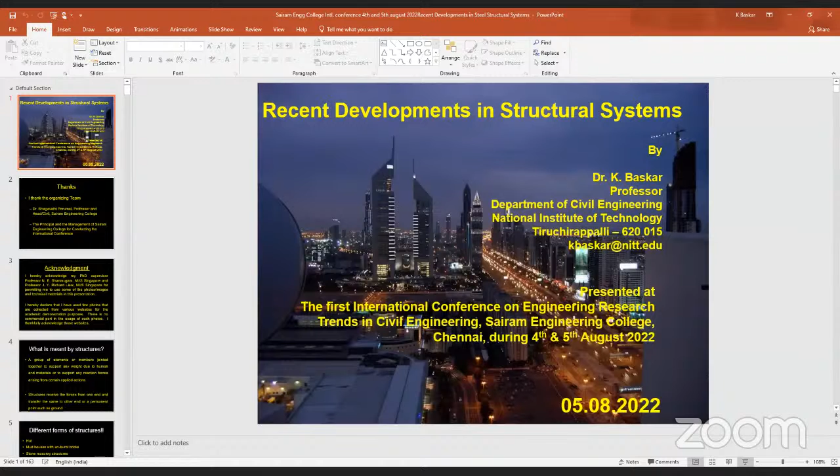Very good morning to all of you. I am Baskar, professor in the Department of Civil Engineering, National Institute of Technology, Tiruchirappalli.

First of all, I wish to place my sincere thanks to Dr. Bhagavati Perumal, who is known to me for more than 20 years, a good friend of mine, very sincere, hard worker, highly ethical and professional teaching faculty. He is a very genuine person, and I'm very happy to share some of my information in this conference organized by Dr. Bhagavati Perumal. When he approached me regarding a lecture on this conference, I immediately accepted for two reasons - one is to honor my friendship, the other is to share the experiences. Those are the two options.

It is disseminating knowledge from one end to the other end. What is the purpose of conferences? It is disseminating the knowledge from one end to the other end.

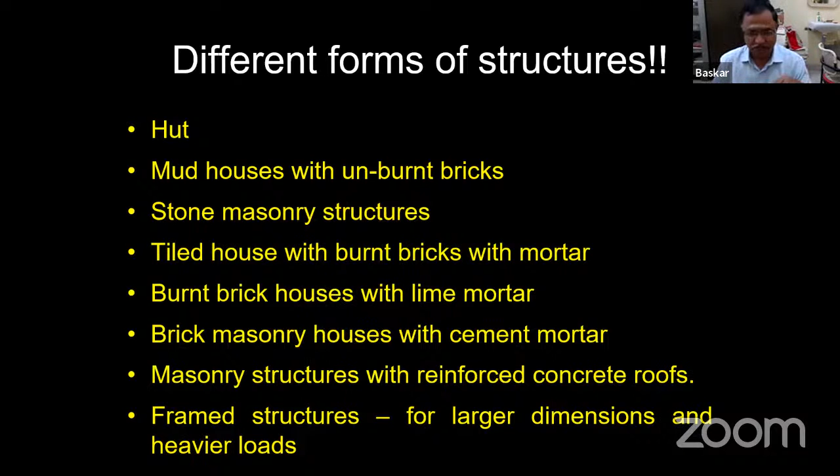Finally, now we are working on framed structures. Framed structure means it can go for larger dimensions and for heavier loads. Now our focus is more on framed structures.

In rural side, even for small buildings, people are still going for load bearing structures. This is very important because if you see the Indian scenario, almost 80% of the people are staying in villages, and not all are affordable for framed concrete structures. Still, in any part of India, load-bearing structures are very popular, and therefore they are also subjected to a lot of research.

Masonry walls are subjected to in-plane loading and out-of-plane loading. When we talk about masonry wall bonds, you have Flemish bond, English bond, stretcher bond, header bond, and which bond is good for seismic activity and how we can improve it. Nowadays we are trying to put small concrete elements within that, in a pocket, to improve it.

So as an engineer, as a researcher, there are so many opportunities in each and every activity, even ordinary housing, load bearing structures. In that load bearing structure, the roofing plays a major role.

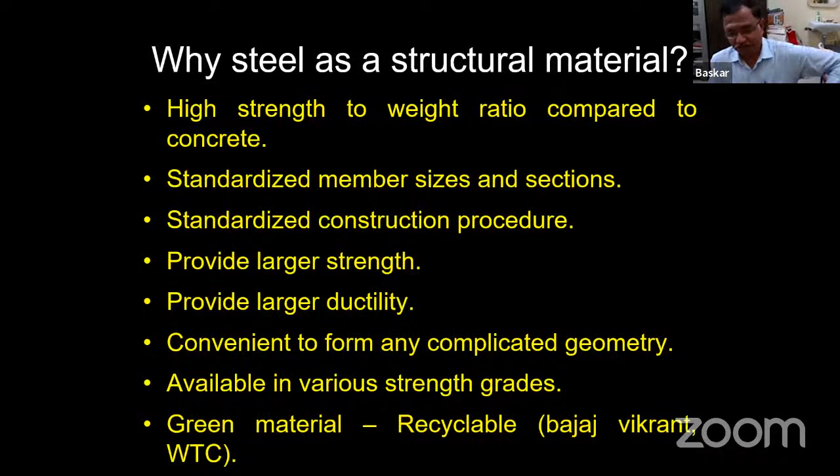So these are all the reasons why we are going for steel construction. Now coming to steel construction, nowadays we have PEB steel buildings. It is used everywhere. This is typically a PEB building.

So this is typically a PEB building, and this is a multi-story building. We are using steel for everything: commercial offices, industrial and processing units, power plants, power and energy sites, warehouses, car parking, residential, malls and city centers. Our Indian people have some idea about this, but we are not very familiar with it. So in this presentation, I wanted to show how steel construction is going on here.

These are all typical steel construction. The frame - the skeletal system will be made of steel. All the columns will be made of steel, and the beams will be made of steel, and the slab also to a certain extent. Otherwise, people will go for composite sections, which are also only for the floor slabs, not for the other elements.

So I will touch upon that - we have composite columns, composite beams, steel-concrete composite. I'm not talking about fiber composite, I'm talking about steel-concrete composite, composite deck slabs. This type of building has no wall, all glass cladding. You have to create the frame with steel.

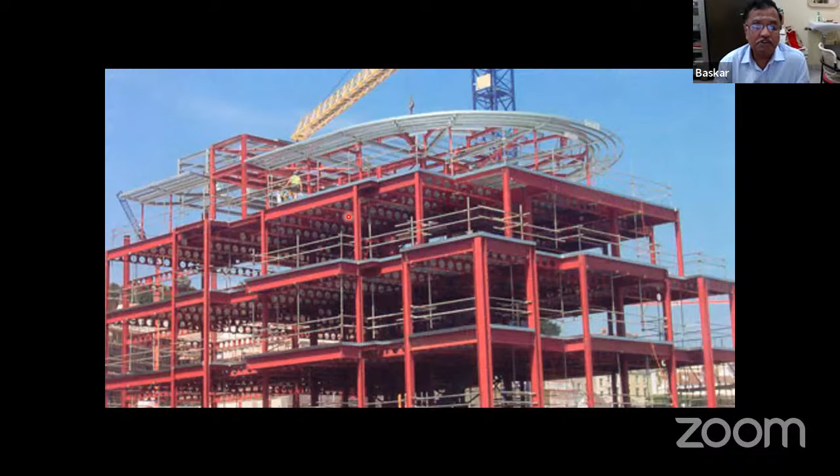This will solve a lot of issues because it will reduce the self-weight of the system and fulfill the requirements. A lot of research is also going on in castellated beams, and people can think about castellated construction. But one thing I want to tell you, in developed nations everything is experimented and done, with a lot of procedures already there. In countries like ours, this type of construction is not popular, so we want to develop it for our own conditions.

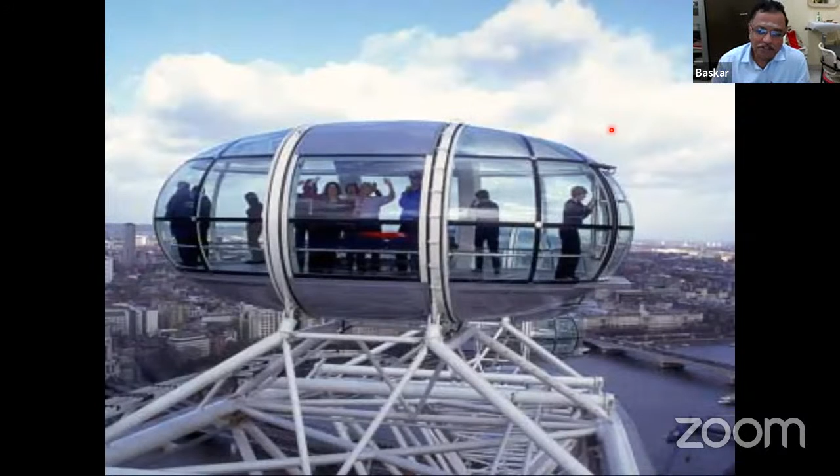Now the design - basically, as I told you at the beginning, when you take any element, what are the different possible loads that can occur? What are the different failure modes that can occur? How can the mode of failure be modified? How can the structural system be adjusted to take care of the failure modes, and what are the different configurations? I'm talking in general, but there are so many things with respect to material, geometry, connection, forces, and more.

That is the reason why there is still so much research going on in this type of ball joints - the fatigue behavior. These elements are subjected to huge fatigue behavior, fracture mechanics, crack propagation. There are plenty of opportunities there. That's why worldwide many people are working in this kind of area.

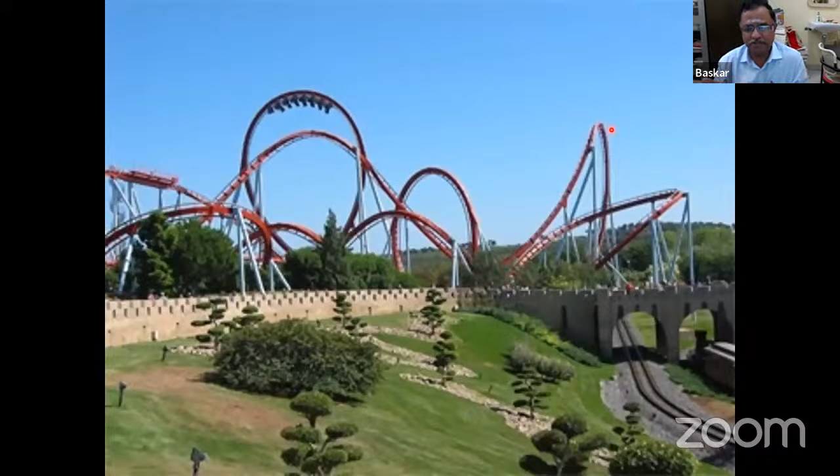Just imagine, many of you might have gone on a roller coaster. Do you think the elements of a roller coaster are so simple? It is not so. One thing is, whenever we don't know much, we can take the conservative side. But if you want to optimize, then we have to go for research. So conservatively, we can do whatever we want - at the moment this is what happens in design. If you don't know much on the technology side, we do the conservative side, and it still solves the purpose.

Whereas if you want to optimize, you have to go for research problems. There is scope, as this will also be subjected to dynamic load, fatigue load, traction load, so many loads. So as an engineer, we have to see all these things.

So we can do research in the connections, in the changing locations of the loads, and so on. This is what happens worldwide. I just wanted to highlight certain things. I think now my time is up.

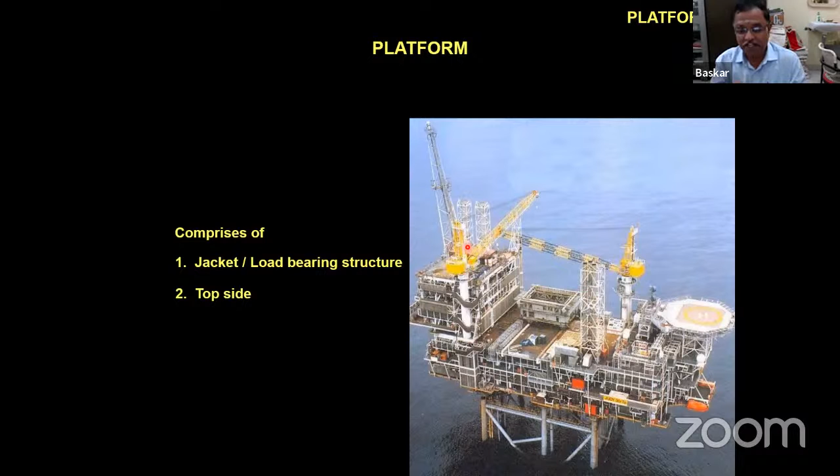And of course, this is another big area where a lot of work is going on in the research side also. This is called offshore oil and gas jackets, jacket and platform. It will be inside the ocean. The entire units will be fabricated on the ground, and then taken to that particular site and installed. Huge work is involved.

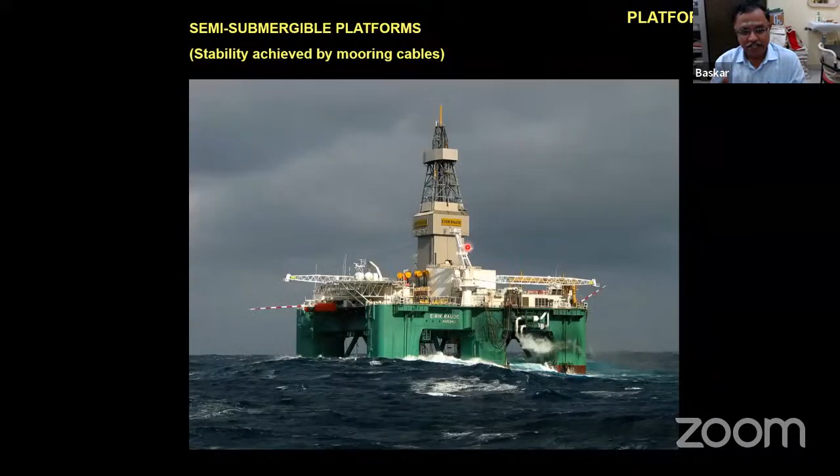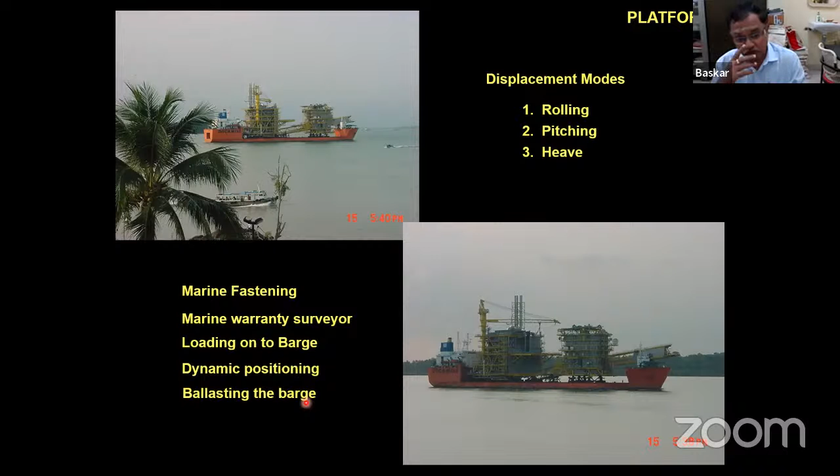During travel, there are some displacement modes like rolling, pitching, heaving, and all those things. And there are people involved in transporting it from one end to the other end: marine fastening, marine warranty surveyor, loading onto barge, dynamic positioning, ballasting. So many aspects are there. There are opportunities to do research as well as working opportunities for civil engineers.

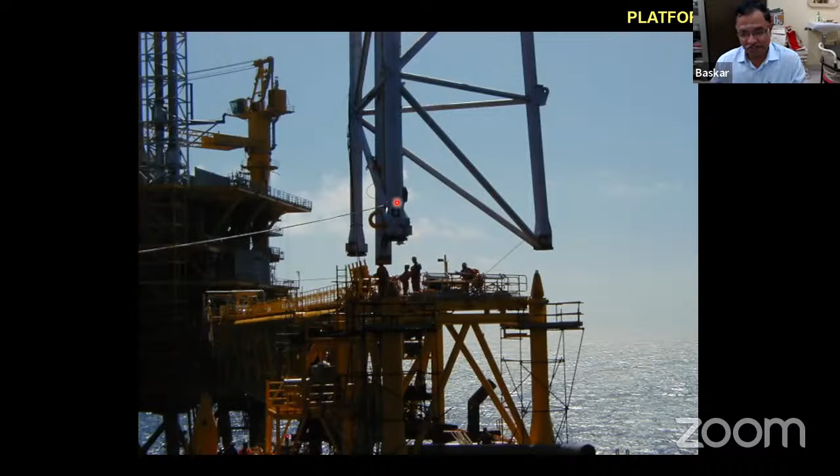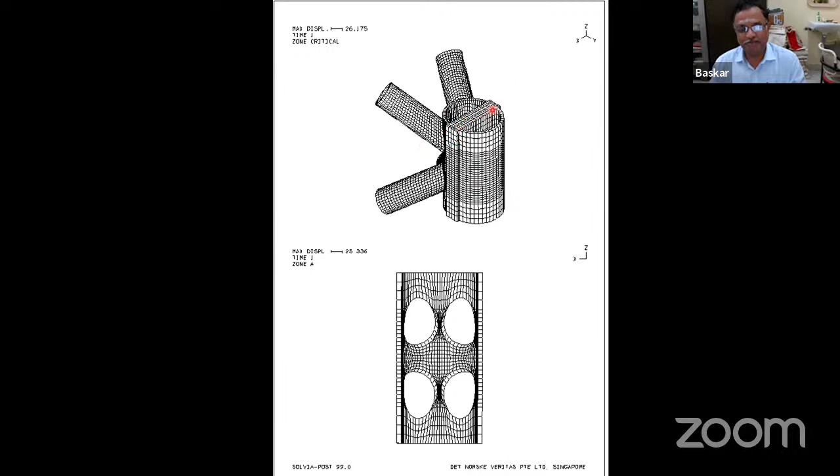And see, this is my own project. In steel, one of the structures failed, and myself and another person were involved in this project. We did the fracture mechanics study here. I did the stress analysis for a particular joint and gave that result to that person. He did the fracture mechanics analysis, and it's a very large dimension - you can't imagine. This plate is like 500 mm thick by 1.5 meters long, something like that. 500 mm thick, so you can't imagine. The sizes are very big.

And this is when I was working in Singapore, I did this model. These are all the stress contours. We try to get the opening stress and closing stress. If you give a crack at the particular location - meaning the weld defect - if you are modeling the weld defect, and when it is subjected to opening and closing stresses, this shows how it progresses. It's all very challenging. A lot of things can be done.

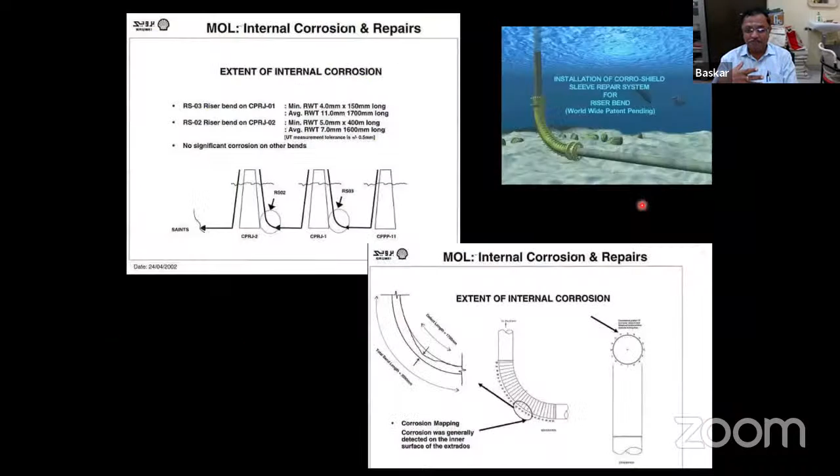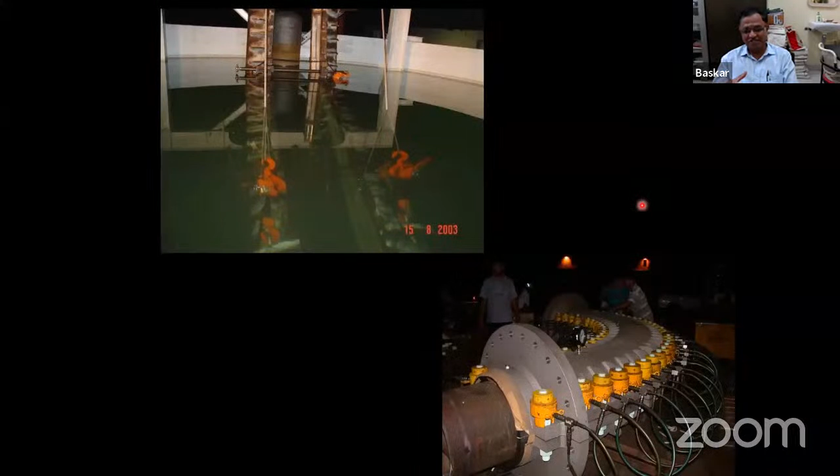So this is another interesting project I was involved in when I was working in Singapore. You need a lot of passion - the entire system was developed by our team. It was quite interesting, a challenging project. Actually, there is a pipeline here that was damaged, 45 meters below the water depth, and they wanted to repair this during operation.

This is a 36-inch diameter pipe at 45-meter depth, and it should be repaired without stopping the process. Underwater welding was there, but that welding was also not permitted, so we wanted to do some cover.

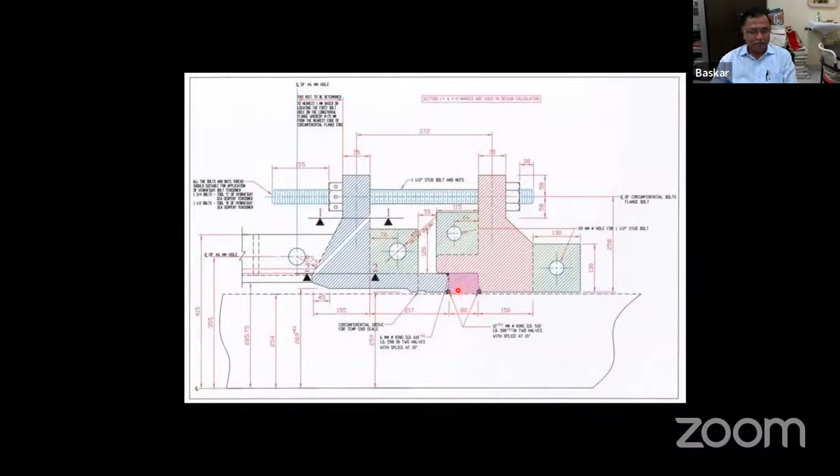This analysis and all I have done. These are all my finite element modeling, and this development I have done. This is actually like a double sleeve, and at the end also we have put a sleeve, with bolt tightening systems.

Everything we simulated in the tank. So these are all research-based projects. We have done a lot of work, like a 1-year project actually. This is the final product.

Then finally it got to the site and was installed. So this is a model piece. Another piece was fabricated and went to the site.

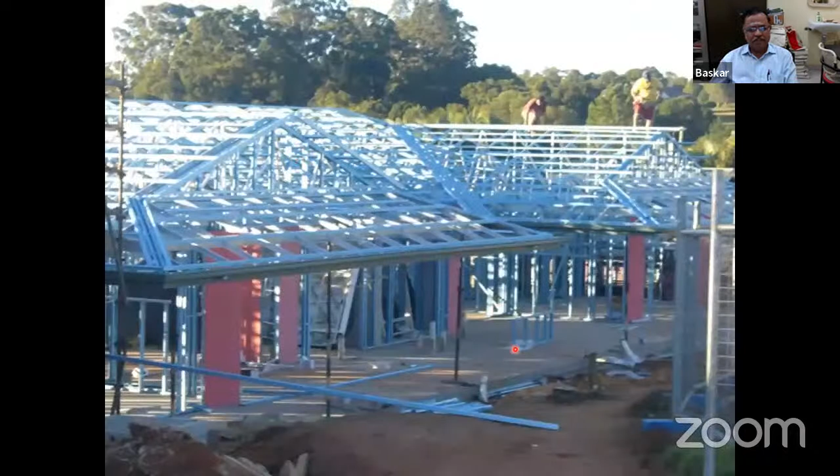Nowadays, for small buildings we are going for cold form steel, and that's the reason why so many researchers are working on cold form steel. We are just replacing the wooden planks, as you can see here.

So this is what I told you, how we are doing steel construction for high-rise buildings. Basically, we will be taking care of the lateral load. We have to split the load into two systems: the lateral load system and the gravity load system. The lateral load system will be made with the shear wall or something like that, and the gravity load system will be subjected only to vertical gravity loads.

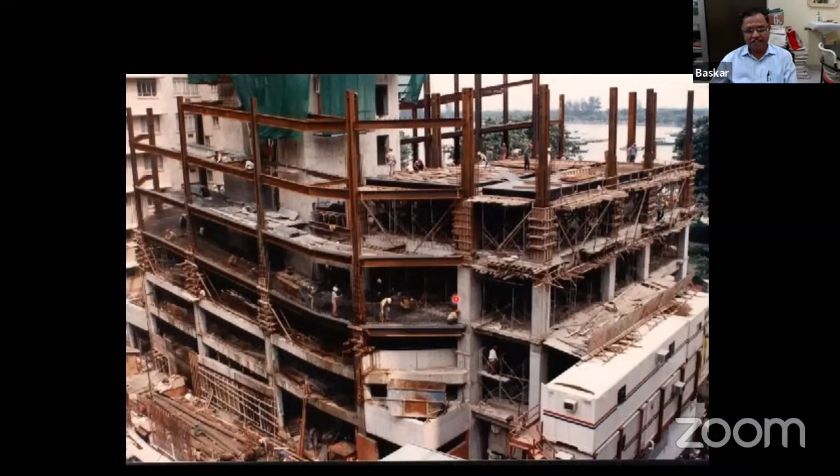This is what I told. This is your shear wall system, and it will be connected with all the gravity loads. These elements will be subjected only to gravity loads. That's why we are doing a lot of testing for axially loaded columns.

This is actually your composite column, the concrete infilled steel tubes. A lot of researchers are working in this particular direction. And these are all the beams connected with the steel concrete composite columns.

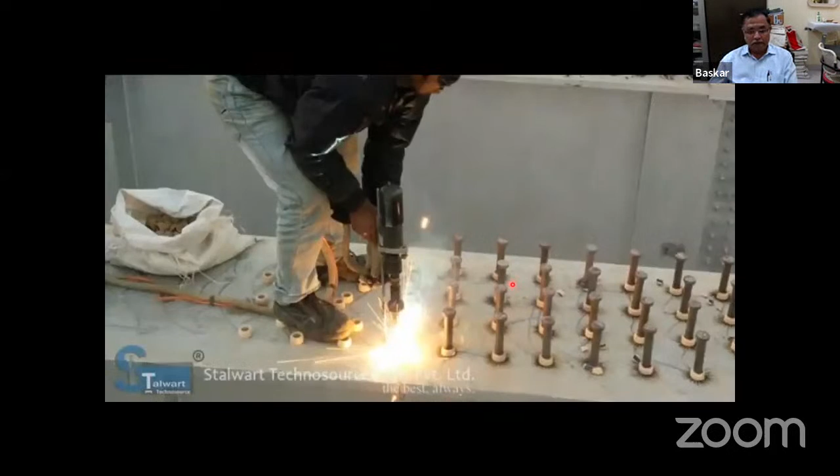The beams will be provided with shear connectors to make the beam a steel concrete composite beam. So the floor will be looking like this, with beams having shear connectors. Now this will act as a reinforcement as well as the bottom plate. It will be like this - you can see the plates, the beams, and then there's a plate.

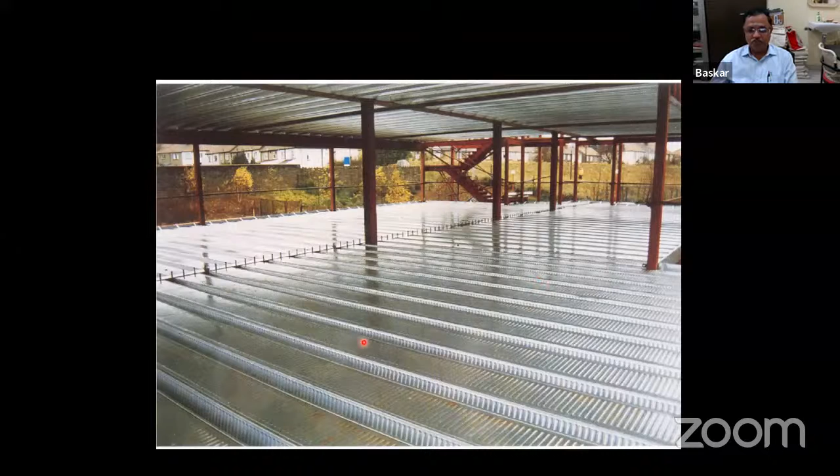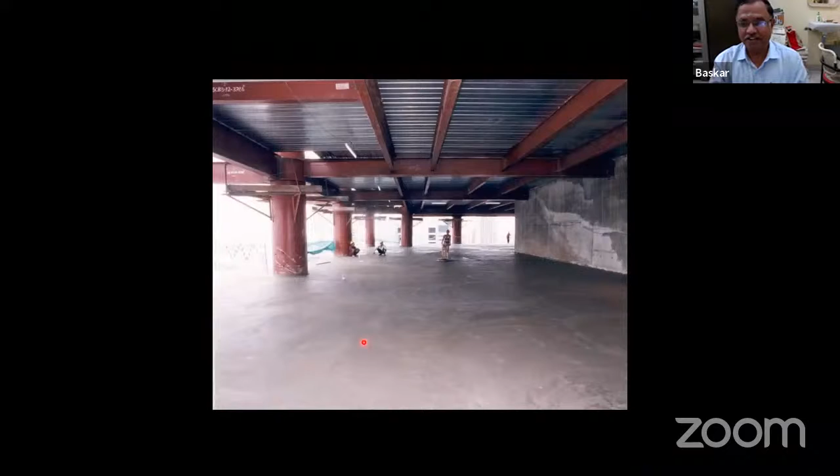That's all, you can go to the next level. We need not wait for curing, that's what I told. We can do faster construction - the next day you pour the concrete. One fellow will keep doing this, and they will keep going up.

Somebody will do the slip-form construction. They will go for this, and then somebody will go for that, and somebody will tie all this, and somebody will do the sheets, and somebody will pump. It is a routine procedure - every day one floor they can make.

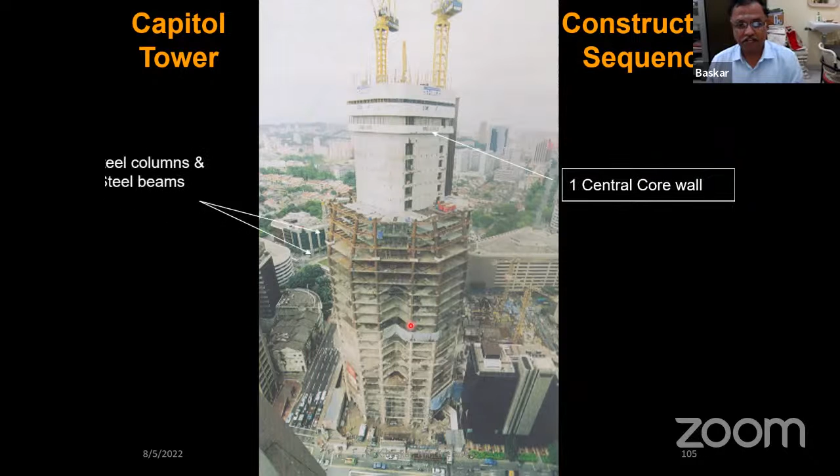This was constructed in Singapore when we were there. This is the core. Wherever the points I'm making, there are a lot of research opportunities - for example, shear wall systems, steel columns and steel beams, composite floor slabs. If you go through the Journal of Structural Engineering or whatever, so much work is going on in these particular directions.

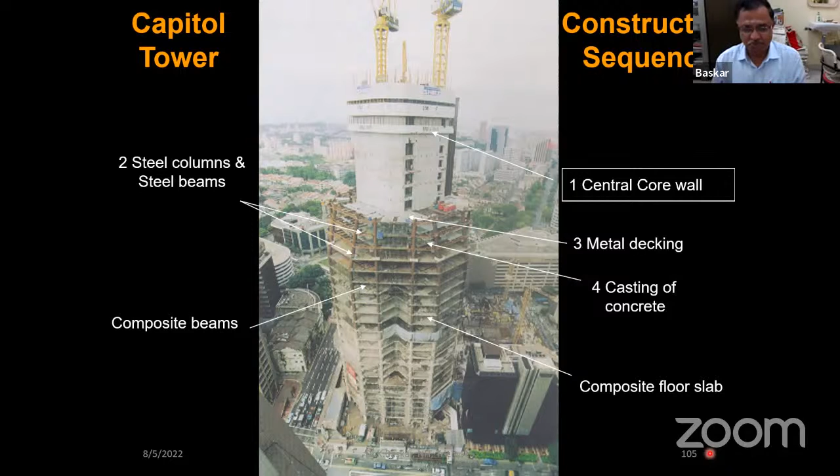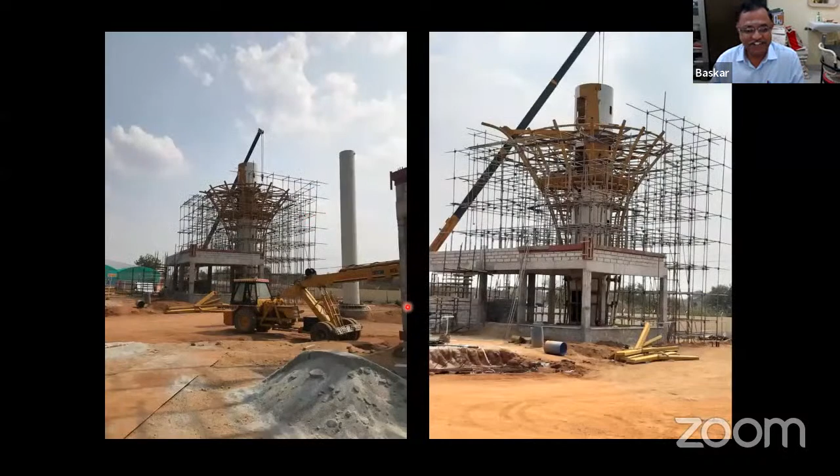This is at the construction stage, and this is the final product actually. These 2 floors are covered, they have restaurant, everything. It is in Hyderabad, and I was also involved in the structural vetting process. I was the person who approved these drawings. So things are like that.

You can do whatever the challenge you can do with the steel construction, and of course you have to do a lot of research.

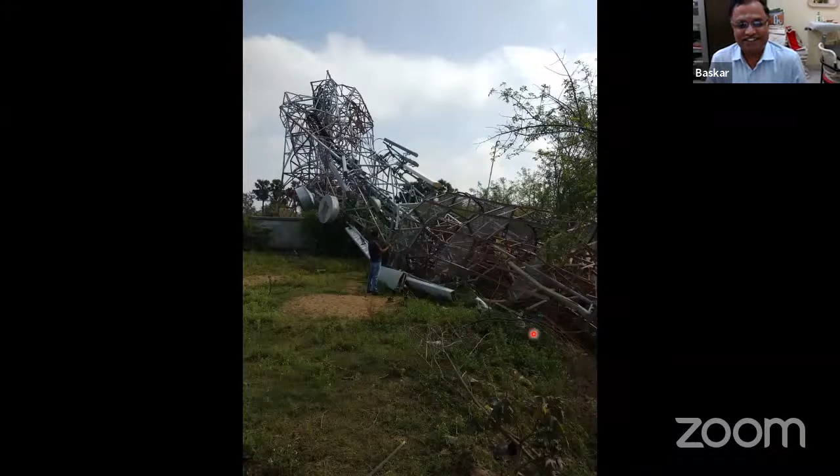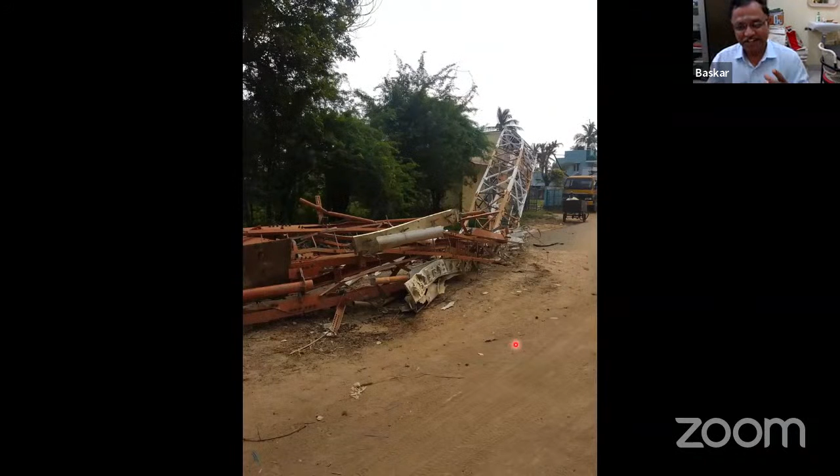So this is a question I just wanted to ask. Things will happen like this also in steel. So this is another important thing. If you are not good at assembling the element, that's why I told this is like a bird's nest - if it is not properly connected, these things will happen.

If people can study about the block shear and all, now we can see the reality. These photos I have taken in the Nagapattinam area when the Gaja cyclone hit this area. The real failure modes you study in steel construction, you can see here - tearing, block shear, everything, shearing of the bolt, foundation shear bolt, shear failure. You can see very interesting failures.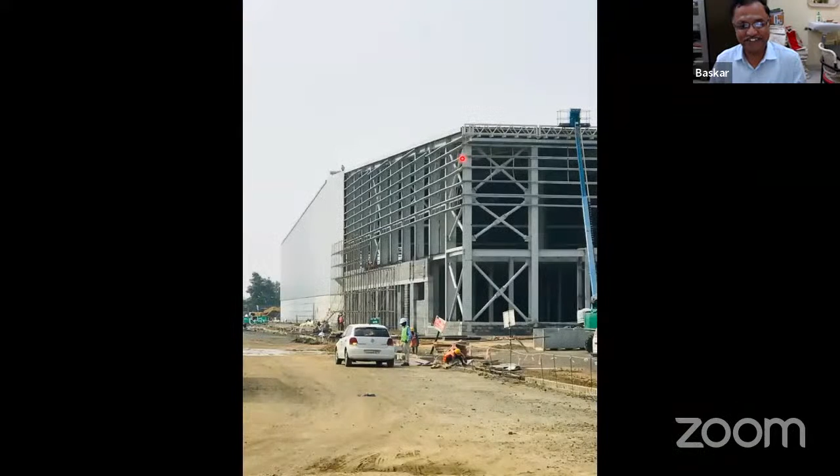So things can happen. The only thing you should understand - you have to put a lot of bracing elements, you have to transfer the loads properly, then it will be a very good structural system. And in that sense only things are going, and therefore a lot of research is also going on.

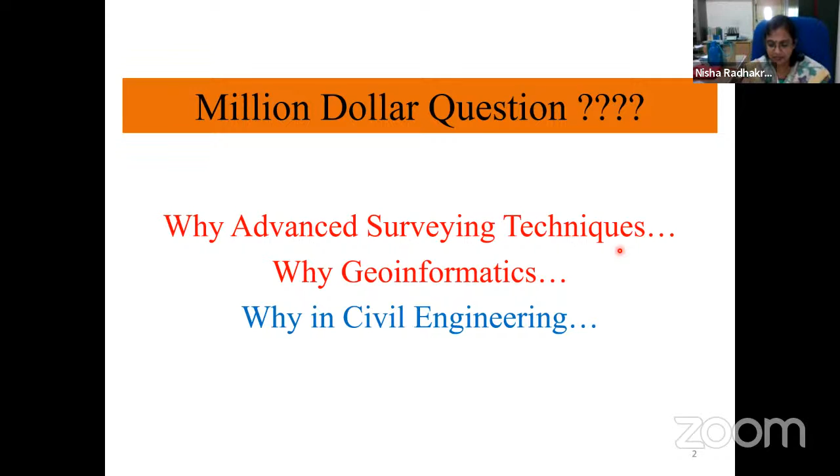Now, the million dollar question is why we are going for these techniques. There are different names - geoinformatics, some call it remote sensing, GIS, advanced surveying, and all that. But why do we require it in civil engineering? The need for this kind of technique, both from the research side and the implementation side, came mostly because of our urban growth.

In India, the growth is happening very, very fast, and you have no idea where it is growing. It could be planned, it could be unplanned. And if it is unplanned, it is chaos. So we have to develop methodologies to make sure that the development is proper and planned. Now where do we do this planning? The first planning would be from surveying. And when technology gets attached to it, then it becomes advanced surveying.

Now things are all digital. You have smartphones, you have smart computers. So tech makes our life very, very easy. We need to look for a technology where you get the answer very, very fast. That's where the conceptualization of these techniques came in.

Now, urban growth in cities - we know that cities are major hubs for all human activities and they play a major role in economic growth. But as I said, in India, these changes are happening so drastically that you have no idea where the change has taken place. So when that happens, what happens? Urbanization. It's a global phenomenon where you have unprecedented growth and migration from rural areas and smaller towns to cities, in search of jobs. Ultimately you will also plan to go either to Bangalore or Chennai and all that. So that's a mindset of ours, that we need to go to places where we can grow.

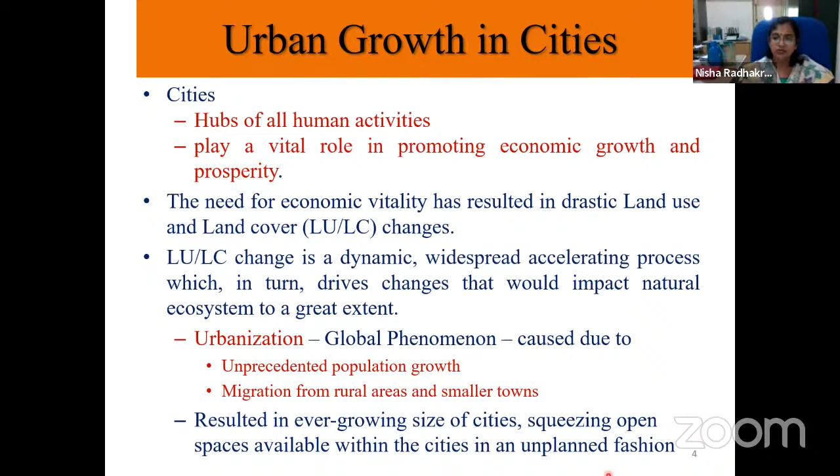But in that pursuit of growth, the city grows in a different way. And what happens when the city grows in a different way? It gets squeezed into unplanned growth. And unplanned growth for the future is not good at all.

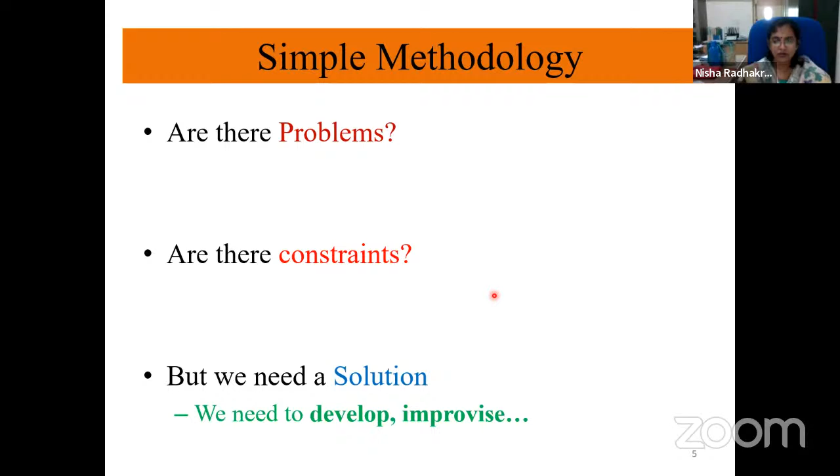So there's a very simple methodology. Because of this growth, are there any problems? The first thing is to identify whether there is a problem. Now, if there is a problem, how do you solve it? When you start solving the problem, you will see there are many constraints. So how do you identify those constraints? And then once you have identified and removed those constraints, we need a solution. How do we develop a solution? That is where we as researchers or academicians come into being. So we need to develop, improvise, and look for new techniques which will allow you to solve the problem.

So urbanization, as I was mentioning, is poor development - unplanned growth resulting in unplanned developmental activities. It has poor infrastructural facilities, urban sprawl, congestion. You may have seen this when traveling in cities - one place is very nicely developed and some places are poorly developed. We really think, why is one side good and the other side not developed properly? That is because it is not planned properly. Wherever people feel they need to develop, they will develop it, but they leave aside the other place. And in future, those kinds of things become problematic for development. So in developing countries like India, these factors will hinder the scope for development in future.

So how do we correct it? We have to assess those changes. What happened in the past, what is happening now - these two things have to be studied, they have to be compared, and then you decide what you require for the future.

In India, there are many constraints, and the constraint starts with data. When you start doing such kind of work, you will find it very difficult to get data. The data may be incomplete, there may be unavailability of data, and fund is a problem. Traditional methods like chain, compass, theodolite are available, but other things are not. Large data, if available, is uncoordinated, you don't know where it is, and information is not updated, sometimes 20 to 40 years old, but current information is not available.

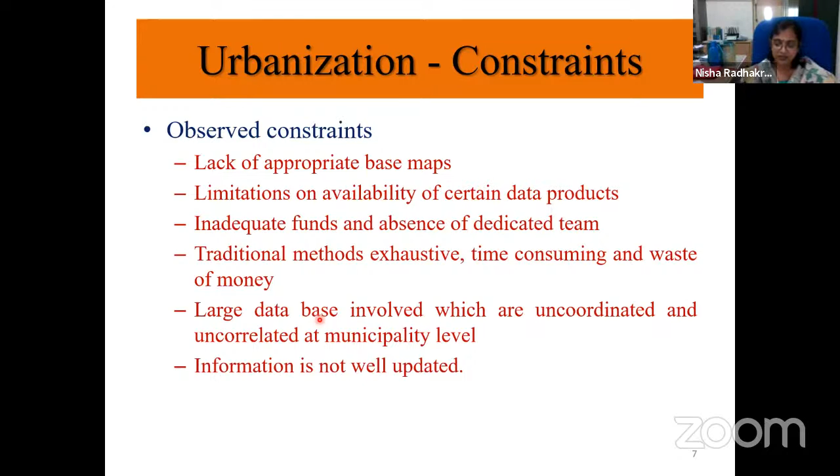These constraints can be removed when you go for digital information. That's where advanced surveying comes into being. In order to tackle all these problems, this new concept has come. Now it's not new, but things have started modifying. In the past 10 to 15 years, many changes have happened in surveying. At the UG level you learn basics, because that is the mother of all these advanced surveying techniques. That fundamental is put into advanced surveying, but it makes your methodology much stronger when it comes to project development.

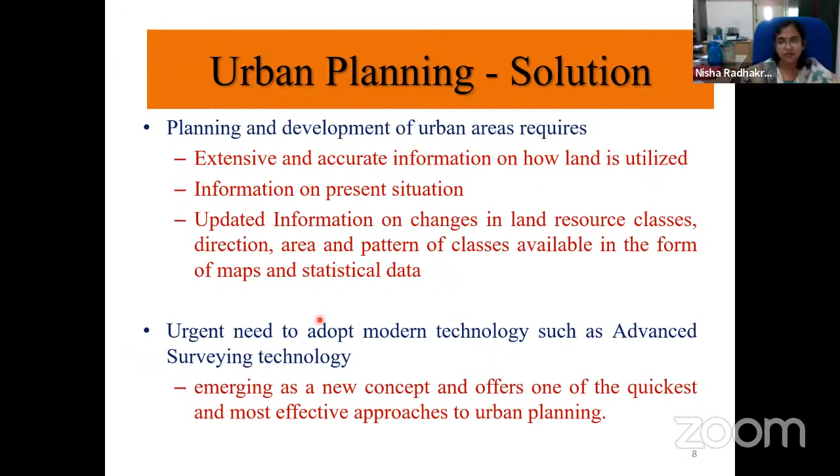So like I said, there are different names: advanced surveying, geoinformatics, geospatial, all those things are there. There is one more thing we prefer to use at project level, we call it 3S technology. That's S from remote sensing, S from GIS, and S from GPS, because these three are the main advanced surveying techniques. Of course now you have drones, but drones have their own limitation as per government norms. Without permission and certified license, you cannot use drones for these purposes. So still, the entire thing is limited to remote sensing, GIS, and GPS.

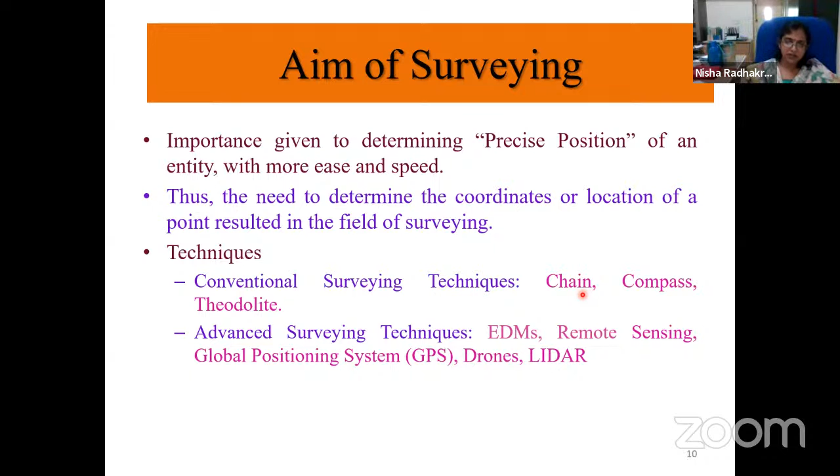Now, you are quite aware of the definition of surveying, I will not get into it. But what I want to specify is these techniques, I prefer to divide into two. The equipments where you understand the fundamentals, which you learn at UG level, they are chain, compass, theodolite, level and all. Then advanced equipments which make use of electronics and other techniques, we can put under advanced surveying techniques, like EDMs, total stations, remote sensing, GPS, drones, lidars. These all come under advanced surveying techniques. All this you are quite aware, chain, theodolite, dumpy level, plane table and all that.

Now these equipments, though important, are very important from an academic point of view, and for small scale works. But when you do a vast area of work, these equipments have their own disadvantages. The main disadvantage is the amount of work you can do with them is limited, you can study only small areas. Then intervisibility is mandatory, if there are two people on two sides of a chain, the person from one side should be visible to the other. So the equipments have to be visible. You cannot use it at night time, and if it starts raining, you have to stop the work.

Then you require a lot of people. For a chain itself, you need 2 people, and to carry it takes a lot of time. Then for theodolite you need 1 person for the tripod, then for theodolite, then you need to carry tape or chain, then other accessories. You require a lot of people to work. Time is very important now, so the entire conventional surveying is very, very time consuming, you cannot think of finishing the work in one day. Budget is limited, you have to think where you can cut short finances.

Then the most important thing is that surveying means coordinates. All of us know what is Google Map, what is Google Earth. In Google Map and Google Earth, the coordinates are latitude, longitude, and height, so there are 3 things. These 3 things tell you your position, how your mobile phone will tell you where you are, right? That is because it tells you lat, long, and height. None of the conventional equipments will give you 3-dimensional observations in one go, you have to carry 2-3 equipments together, then you will get 3D. So that's where the hurdle is, too many equipments, too many calculations, too many methods. We need an equipment which will give us the answer then and there, 3D, no calculation involved. That is what our idea is.

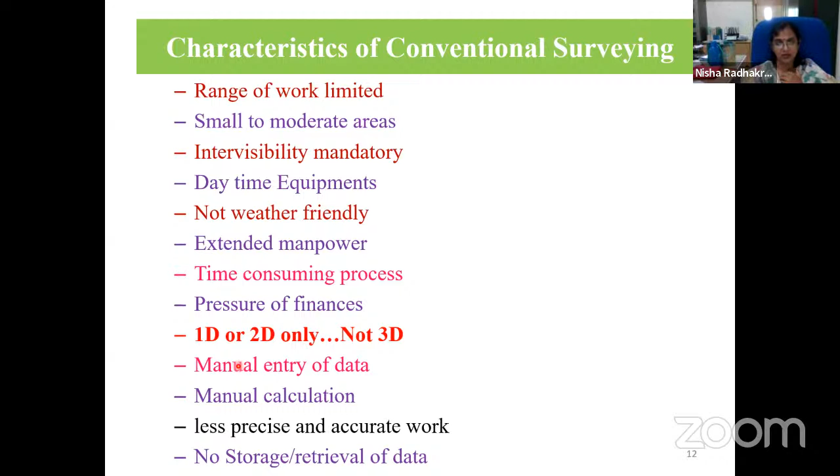That's one of the major constraints when it comes to some government offices. It's very difficult to get the data. The data is available, but we don't know where it is lying. So that's where we require digital information. Digital means you can store it somewhere for as many number of years as possible. So to overcome all these limitations, you have these number of equipments, which has made surveying quite easy.

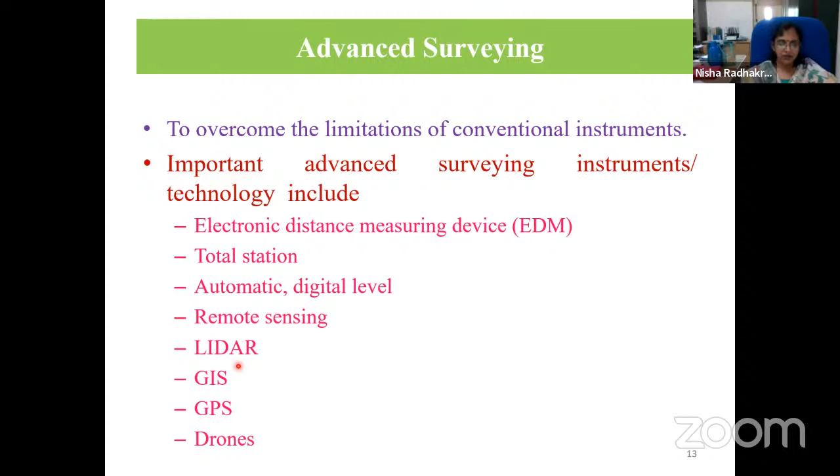But then there is a catch. These things are not cheap, they're expensive. But the initial expenses, we can take care. After that, you can even generate out a lot of revenue from these equipments by doing some kind of research or some kind of consultancies and all that. So these equipments are going to be there and you can use it for many applications.

So removing out some of these things, intervisibility is not required. You can use it at any time of the day. Then all the data is automatic, so it is digital. There's no writing. Storing and retrieving is possible. Large amount of data can be collected. It is less time consuming. You can download the data.

Then there is no calculation involved, in the sense that manually you are not calculating anything. The calculation is done by the equipment itself. So all these equipments have their own processor. So whatever fundamentals you learn in surveying, it is put into the processor in the form of a software. So the software will take care of the calculation. So once you fix up the equipment and start taking the reading, it will give you the answer on the screen itself. You can download it. You will get the lat, long, and height immediately, just like that. So 3D measurements is possible.

Okay, now this, I'm sure many of you would have seen. This is a simple total station, an electronics total station. And if you see here on the screen, you will get the latitude, the horizontal angle, vertical angle, and also the distance. So you fix the equipment somewhere, and from the equipment, one laser beam will come out. It will strike the object. From there, you will get all these answers. So that's principles of electronics.

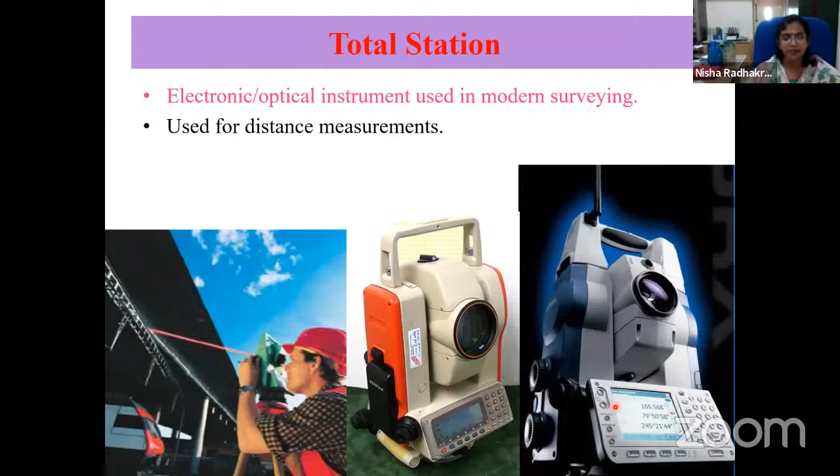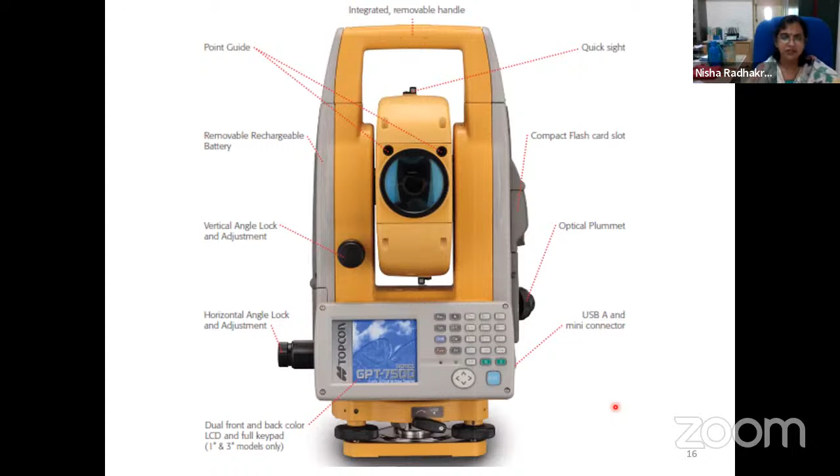Okay, now there are different companies which are coming up with different theodolites. Some of the companies are like this: Pentax, Sokkia, Trimble. Trimble is an equipment which makes use of GIS also now. So all the data will be stored in a GIS platform within the equipment itself. You can download it. Then you have Wi-Fi, Bluetooth, GPS, everything is available in the current total stations that are present.

Now here, all that headache is not there. You just have to fix up the equipment, sight whichever point you require, send that beam, and when it comes back to the equipment, you get your answer. The height, the distance, the angle, everything is available on the screen. You can note it down or save it in a file and download it later. That's total station. On the screen you have horizontal distance, vertical distance, angle, and distance - the entire answer is here.

You don't have to sit and count the number of divisions in the theodolite. You don't have to read vernier A or vernier B. You don't have to run a tape, nothing of that sort. Everything is available on the screen.

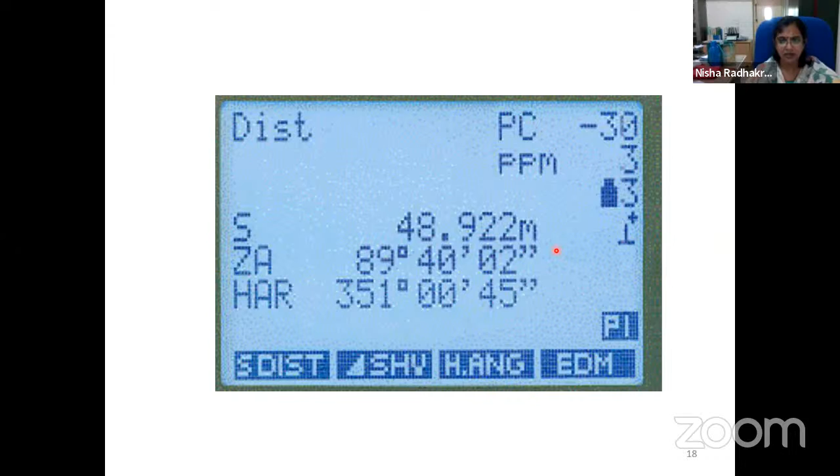Then you have digital level. This is an advanced form of dumpy level, and again electronics is involved. The equipment sends out a laser beam, and the laser beam gives you the reduced level. Normally when you do levelling, you take a staff reading, add it with the RL, and get your reduced level. Here everything is done by the equipment itself. You don't have to sit and calculate or draw tables like HI - which is backsight, which is foresight, which is the intermediate sight and all that. Everything the equipment will understand.

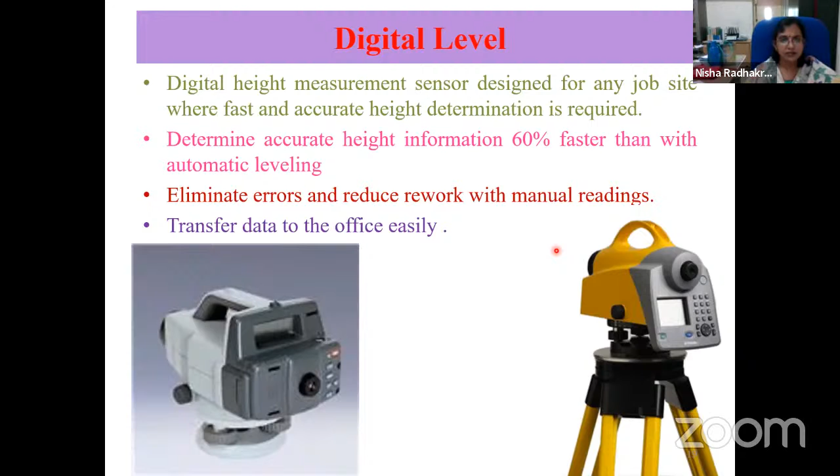You fix the equipment and it will understand the first reading is the backsight, and it will tag it like that. The next moment when you shift, the equipment will understand that is the foresight. And if you want to shift the equipment, you can train it saying I'm planning to shift - when I shift, the last foresight will automatically become my backsight, and it will calculate on its own as you move forward. This is how things have advanced so your work becomes much faster. Work that took 1 month using conventional equipment now comes down to 10 days. That's the speed with which you can work now.

Now one of the major things we use in day-to-day life - all of you use Google Maps on your mobile phone, and many use Google Earth. Google Maps is a major example of a combination of remote sensing, GIS, and GPS. None of you would have wondered how we're able to locate which place we want to go, the direction. There's a circle when you open Google Maps showing your position. You enter where you want to go, and it calculates which direction you should take. How has this come up? It is because of these three things, along with computer science and software development, that you get your Google Map.

You should understand that many things used nowadays are because of surveyors and civil engineers. Google Maps - okay, a software person would build it, but the fundamental behind it, the images behind it, all that is surveying, all that is civil engineering application. So that's a kind of scope. Many software companies have a separate division for this digital domain, like remote sensing or geomatics. For example, TCS has TCS GIS, where they do all these kinds of application studies.

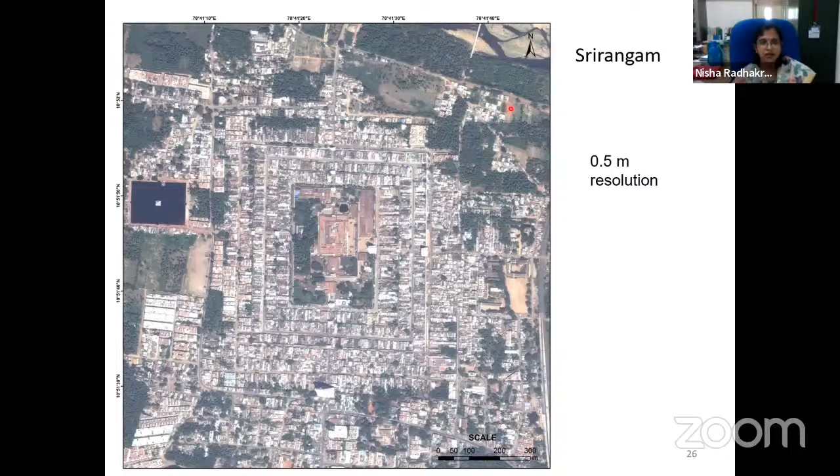Then you can see Srirangam. What is the development of Srirangam? The temple - you see what is the activity going around Srirangam. If you want to build a house somewhere, you can find out which area is vacant from this. So that way you can think of many applications.

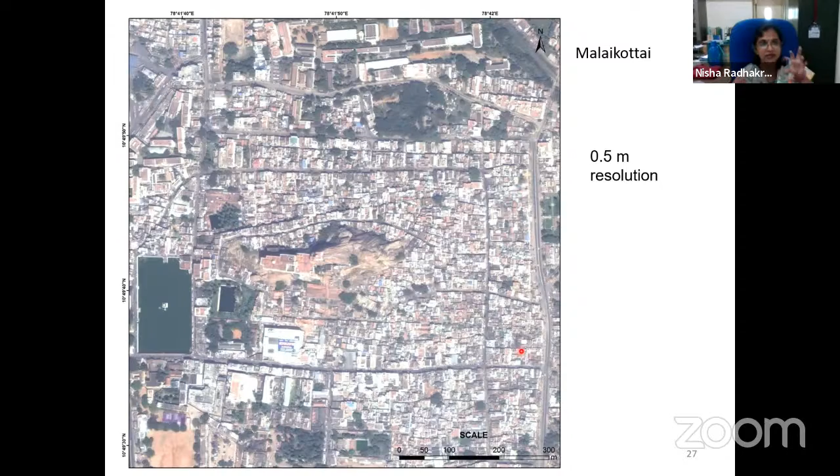This is Malaikottai, another temple very near to NIT campus. You can see the growth. This kind of growth you can only anticipate or understand when you're looking at it from the top. So this is a remote sensing image.

Okay, so those are images which can tell you what is exactly happening. So that is one set of data that you have where you can work with.

Now, that's an image. Now, this image, you have to put it into a software which is called GIS. Now, this GIS will give you a means by which you can build answers very easily. Okay, it's just a digital form of maps. And GIS is digital data. So digital data means you can update it, you can delete it, you can analyze it. It's just coding and all those things involved.

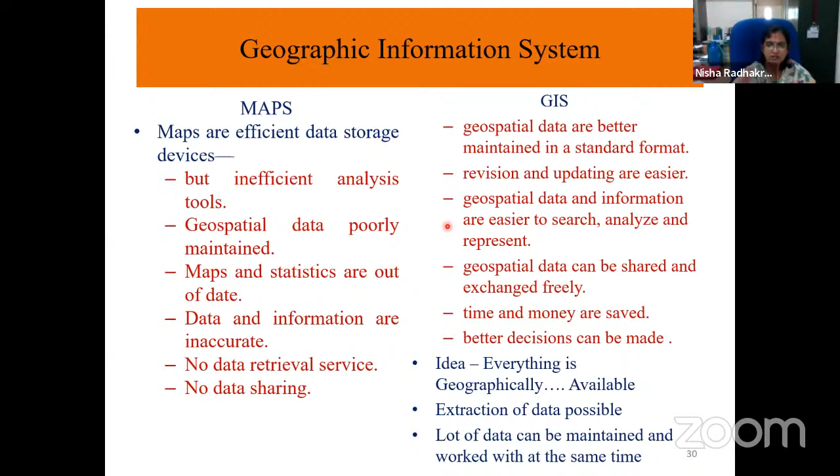So instead of having paper around you, you can have everything in the computer. So that's a GIS - it's a computer system which will allow you to store, acquire, analyze, and display the data. So this is how it is. Reality will be having everything together.

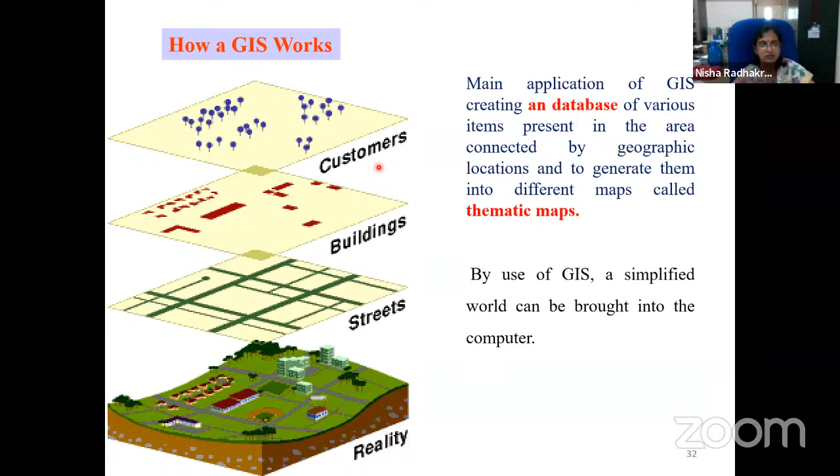Okay, all of you must have seen maps. The map has all the data together. But GIS can allow me to create different maps for each feature. I can have a separate street map, I can have a separate building map - all that I can digitally prepare. And then I can even share the information from one computer to the other computer. So this is how the thing is - you are converting your world around you to computers.

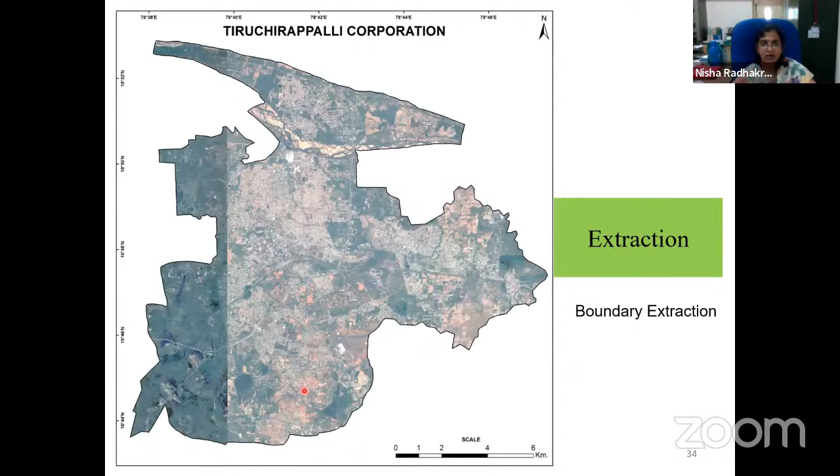So these are some of the applications in GIS. If you have data, you can even cut out what is required. This is Trichy City Corporation - I can extract the boundary, then I can even cut out roads. So we call it as digitization - that is, I can separate out the roads from the image.

I can separate out small sections and study it separately. I don't have to study the entire Trichy city. I can even subdivide it and do the analysis. Then I can extract out all these things. I can give different colors if I want. So if I give different colors, I can do analysis much easily.

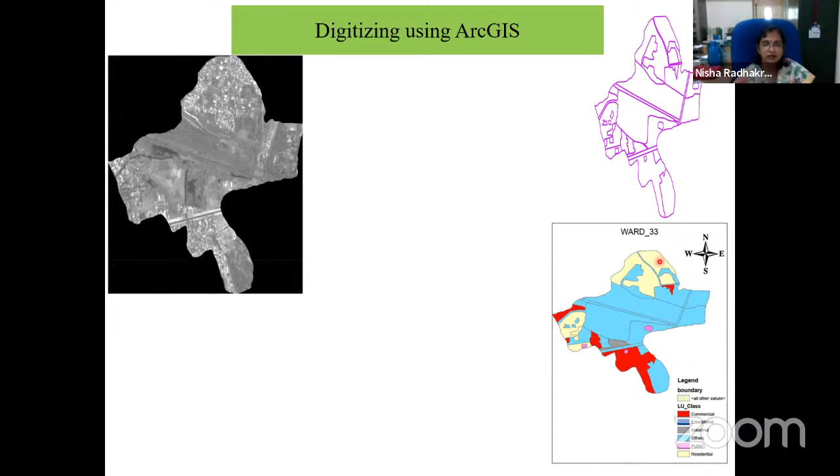Like black and white, you can't get any idea. But here, if you give a color, I'll know this much percentage is commercial, this much is educational, other is all that. In addition to that, you will get a tabular form also. So there'll be two things - one is you can get it in Excel format, and then also you will get it in a color format. So this gives you more value added answers.

So if you want to present it to somebody, if you have this table and the picture, you can convince your corporation people much simpler. Now all this manually you cannot do. Manually you have to sit and draw by hand, then you have to do scaling, all those things - it takes a lot of time. Whereas here you will get it very beautifully.

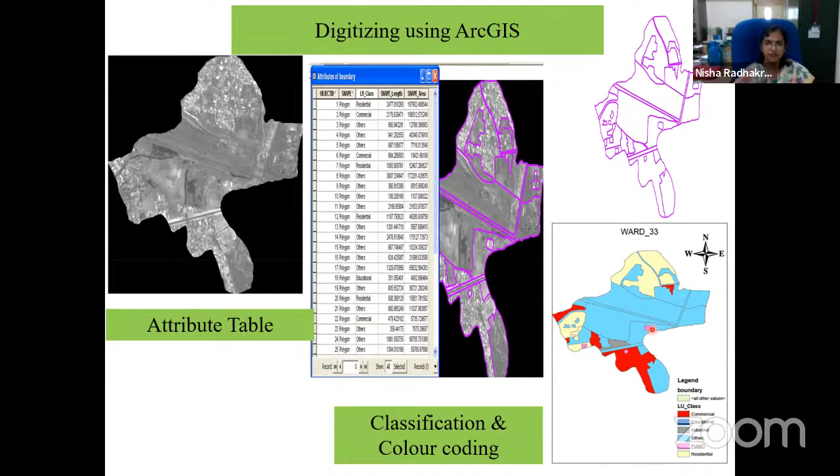Then GPS is used for getting coordinates, like how your mobile phone gives latitude, longitude, and height. Google Maps is an entire example of a combination of these three technologies.

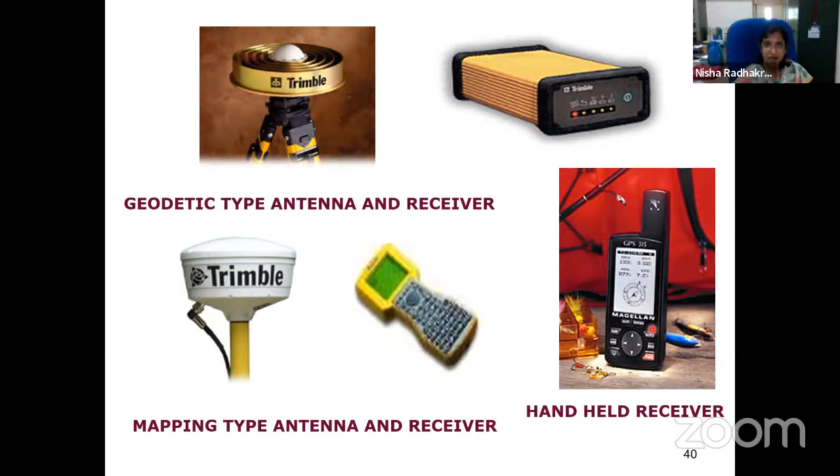There are many GPS equipments. One good example is your mobile phone itself. Different applications will have different GPS - Ola, for example, that app works on your GPS only. These are different varieties of GPS based on application.

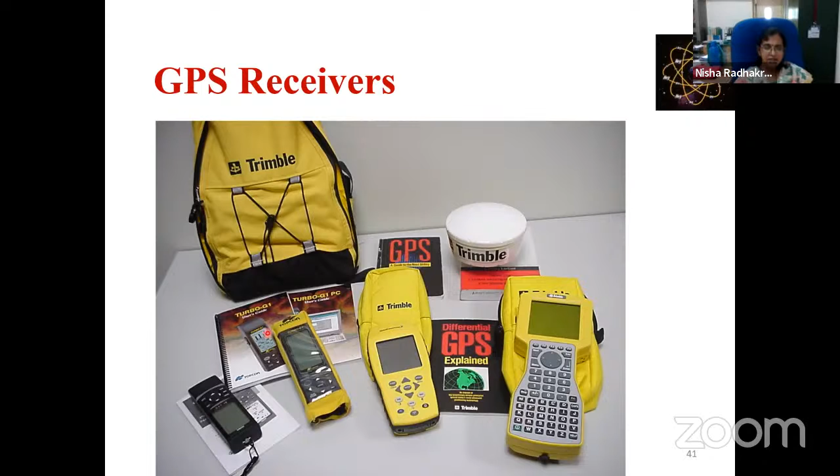There are GIS also involved in this, and there are some good examples where GIS and GPS have been used together. Using just this yellow color handheld equipment and GIS, the entire map of IIT Bombay was prepared. This was done in the year 2000-2001 by some BTech students. You can see the details in which it has been done - they completed it within a few days or maybe weeks. But when doing this manually, you would not get this much precision or this kind of detailing and drawing. It's impossible manually. This is one very good example of these applications.

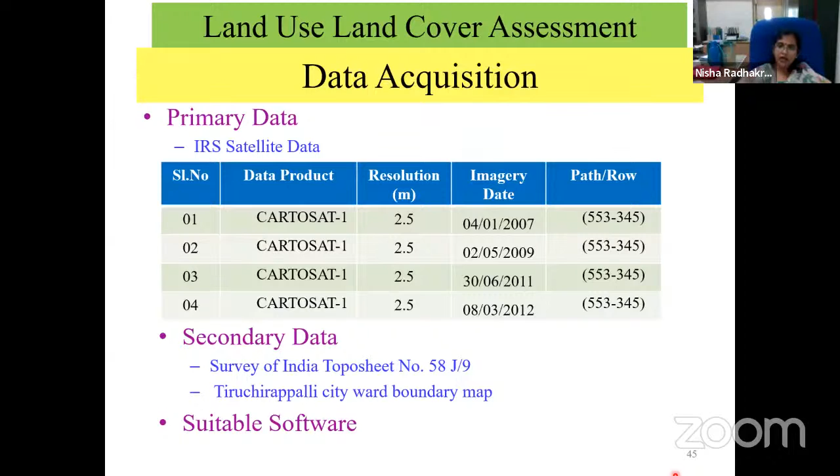Now some applications in urban planning where remote sensing can be used. This is one project we undertook for Trichy Corporation, where images of different years were selected and the growth of Trichy city was analyzed, just to know whether the growth is planned or unplanned. These images are purchased from government organizations, and the analysis is done from that.

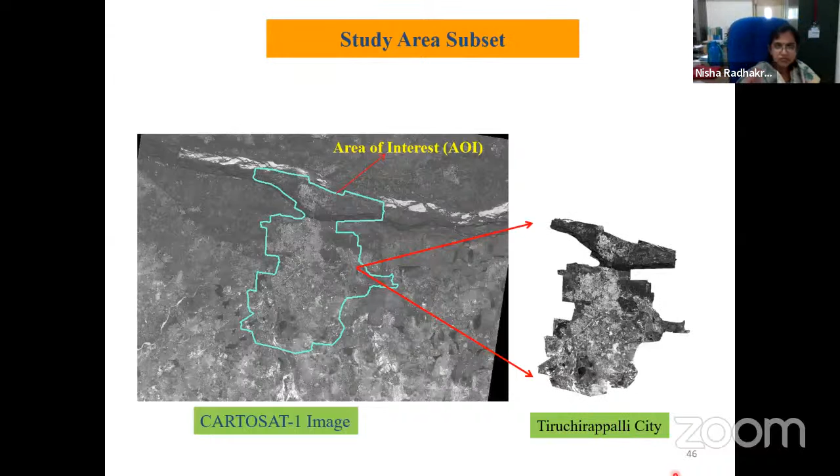All these images are black and white. Looking at the black and white image, you won't know what it is, so once you extract, you have to study the area. Once you know what the area is, you can give your own color code. This is the original image - it's a photograph, and every photograph is made up of pixels. Each pixel will have one color in it, and that color will tell you what the object is.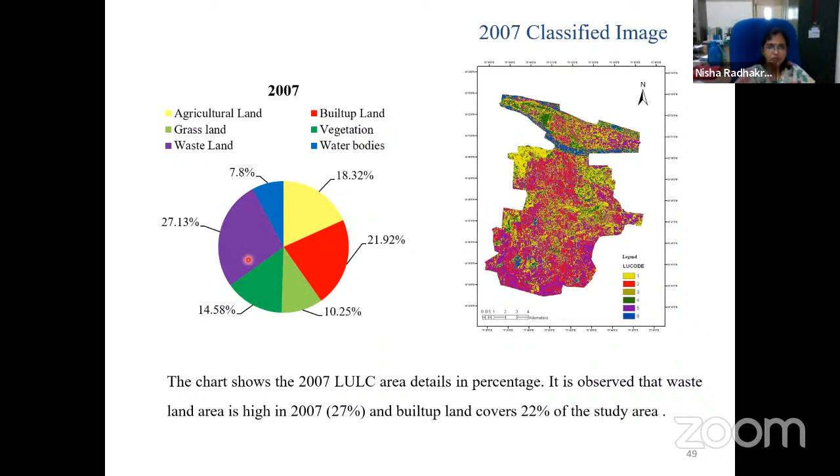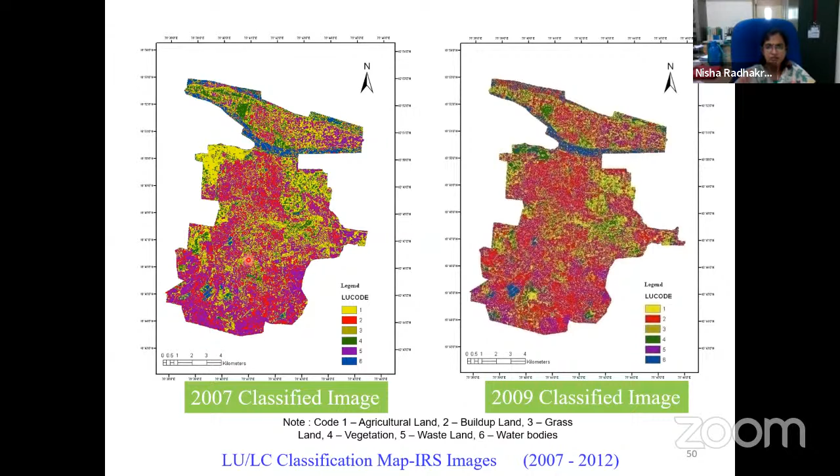If you study different years, you will know what is increasing and what is decreasing. If you look at these images, 2007, 2009, green is reducing, and red - urban activity - is increasing. If you keep comparing, you can do statistical analysis and inform the government that agriculture land is coming down, built-up land is increasing, wasteland is getting wasted. Once you understand that, you put a tab there - no more development, and if development has to take place, where should it take place. So those statistical analyses you can give the government, and they can take care of the remaining development. All this is now coming as part of smart city concepts too.

Once you've understood the growth pattern, you can even predict it for the future - that this much growth will take place. And you can do site suitability analysis. Suppose you want to have a house somewhere, you will look at so many factors. As a lay person, I will look at the surroundings, the slope, whether the soil is okay, whether I'm getting enough groundwater, then the distance from the road and all those things.

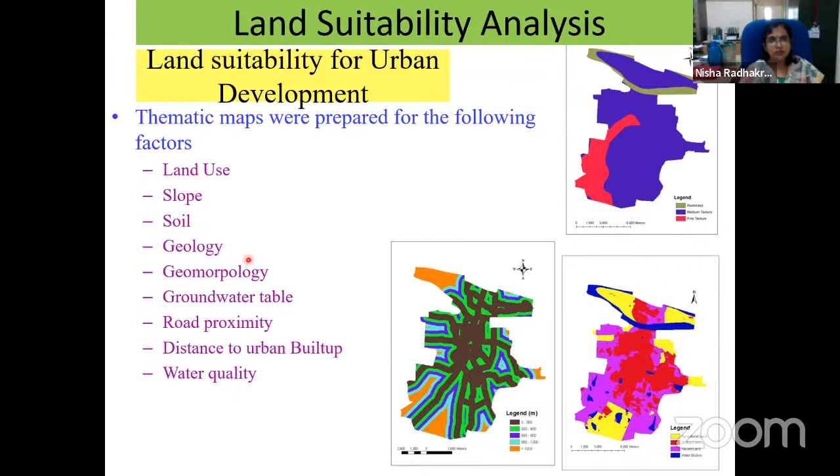If you want it in a fine way, when we do urban planning, if we know what growth is taking place, I will develop a land suitability map based on these particular factors. I will create a map, create a model, and that model will tell me how much land is available for development - moderately suitable, marginally suitable, unsuitable - and also the location of those places can be created in the form of a map. So if I want to build a house, I will look at these red zones.

These red zones tell me, okay, this is fine. The yellow region is marginally suitable. The black portion I should not touch at all. If I fix up a house there, then it's a gone case.

So those are the kind of things that corporation people can do, or even you can do if in future you want to build something. Rather than going here and there, visiting so many places, building it, and then finally observing that you've made a mistake, you can decide beforehand what you want to do.

This thought never comes to our mind, where surveying applications could be used in structures. But in structural engineering too, surveying is important. For constructing a structure, you have to find out the area of the land, so survey comes into play there too.

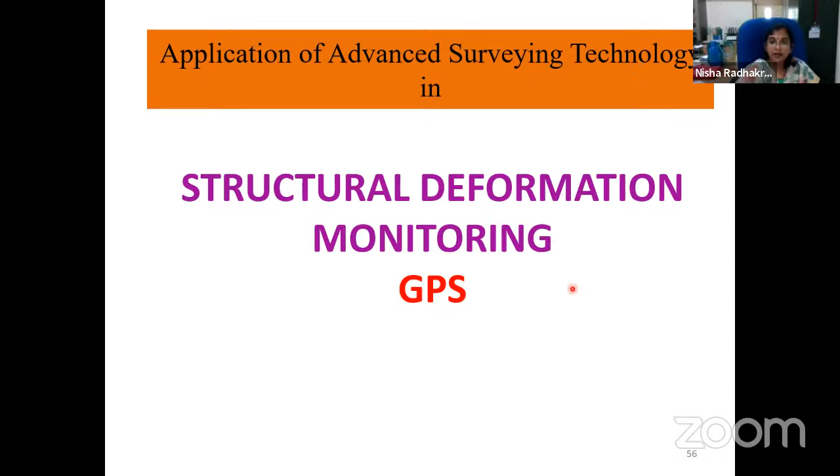So to study structural deformation, we use digital photographs to analyze cracks, LIDAR, and also GPS. GPS is adopted in many places. In foreign countries, it's fixed in almost every high-rise building. In dams in India, it's fixed up in Koyna Dam. These GPS equipments can tell you whether the structure is moving way beyond its threshold.

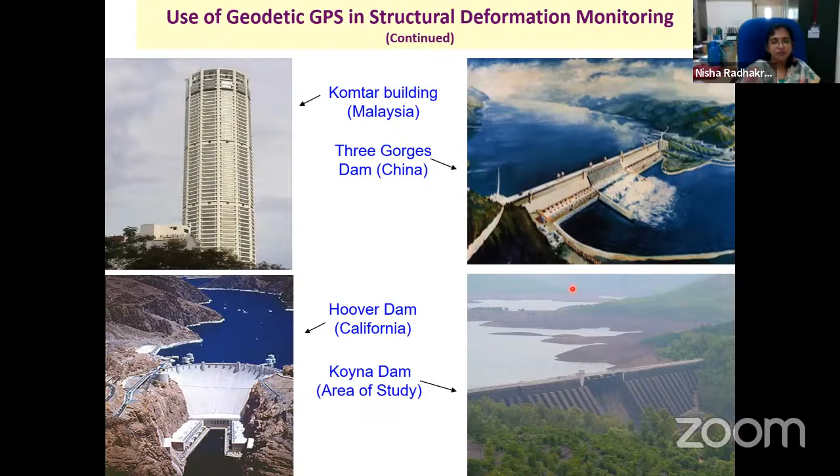I'll move fast here. This is a structure situated in Maharashtra. This place is famous because it is believed that before the construction of the dam, it was free from earthquakes. But immediately after the dam was constructed, the place started observing a lot of earthquakes, the major one in 1967. The dam withstood all that and is still standing, but tremors keep happening at smaller rates. Many organizations have been involved, one among them was IIT Bombay, where I myself did my PhD on this.

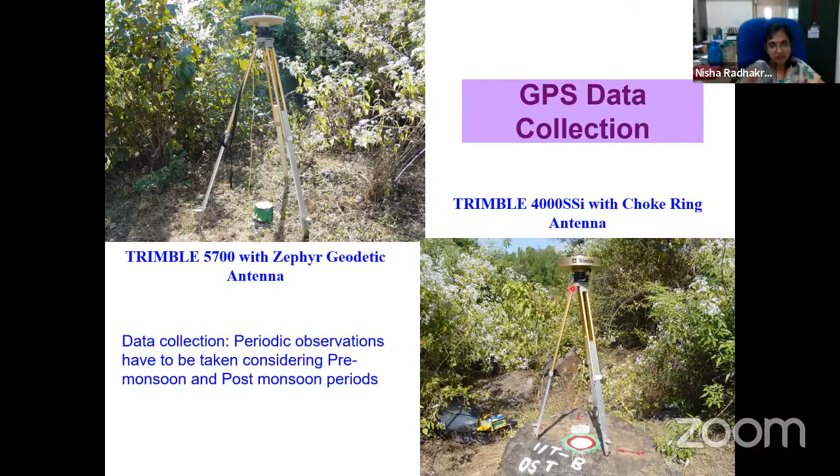Using GPS technology, there are equipments which continuously monitor the dam, below the dam, and so on, and then the analysis is done. We know that behind the dam, the water level rises. So how does the dam sway, or how does it respond to the water on the upstream side? Those kinds of movements you can analyze.

Using GPS, you can know when there's a rise in water, what is the deformation, and if there's a fall in water, what is the deformation. You can also understand which direction it is moving, whether northeast, southeast, and so on, again using GPS. And if the movement is way beyond our imagination, then you know you have to study this further. This gives you an idea about the movement of the dam.

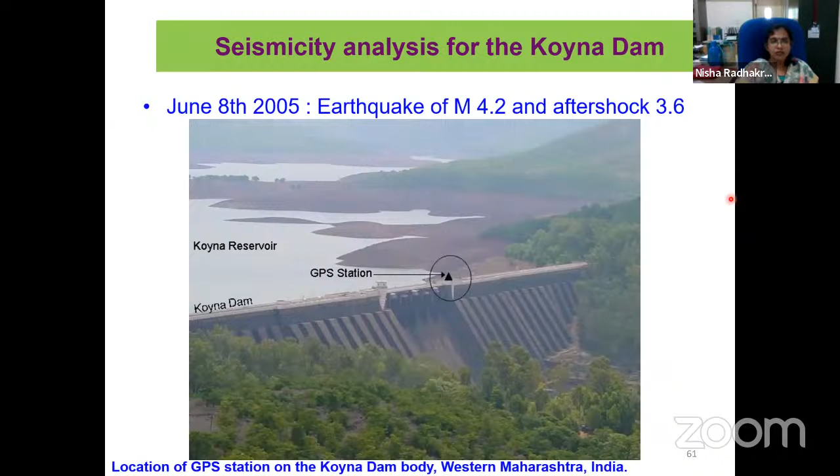Everything will be at the surface, that's the kind of thing. Then you can even do seismic analysis and study whether the structure is safe or not. It so happened on one of our visits, there was a tremor when we were collecting data. So we took the data and analyzed it, and observed that when the earthquake happened, the dam shifted by some centimeters.

It shifted 2.3 centimeters in the northwest direction. But immediately after the earthquake, it swayed back again in the opposite direction with the same speed. Based on this amplitude, we observed that the dam is safe. The similarity in displacement and opposite direction told us that the dam is very elastic, which is why it withstood those major earthquakes and whatever minor ones have taken place in following years.

We gave our report, and even now tremors are there, but the dam is pretty much safe. So these equipments can also be used as an alternative. I'm not saying this equipment is the only one, no, it can be used along with other equipments for calibration and validation and all that.

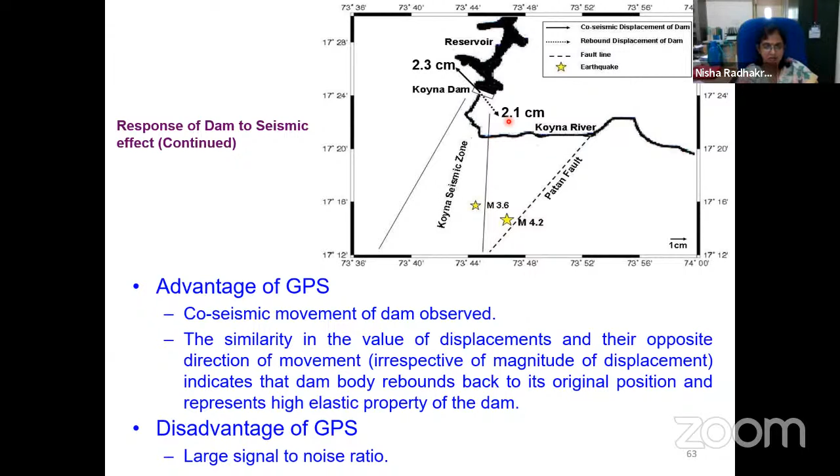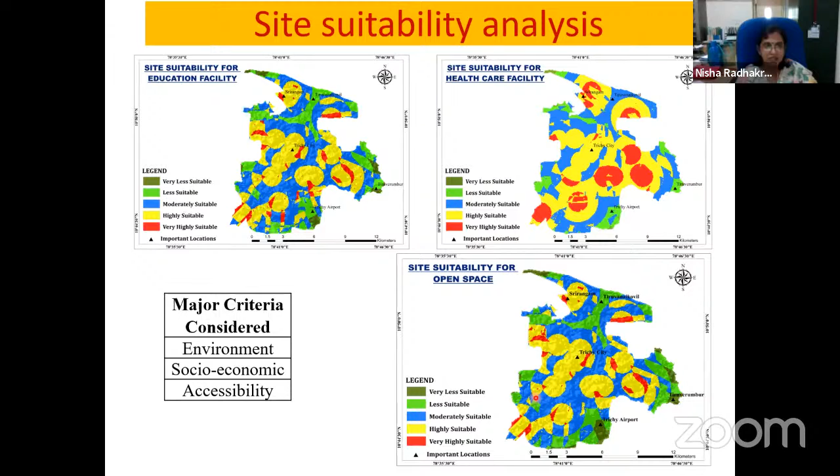This is the end product of the study. There are a lot of things you have to collect to get this end product, but it will be useful in any high level judgment and justification. You can also do flood risk assessment, like which areas have high risk of flood and which have low risk. Wherever you feel the hazard would be more, you can do proper rehabilitation, proper construction, and proper drainage facilities there. All this you can create using GIS.

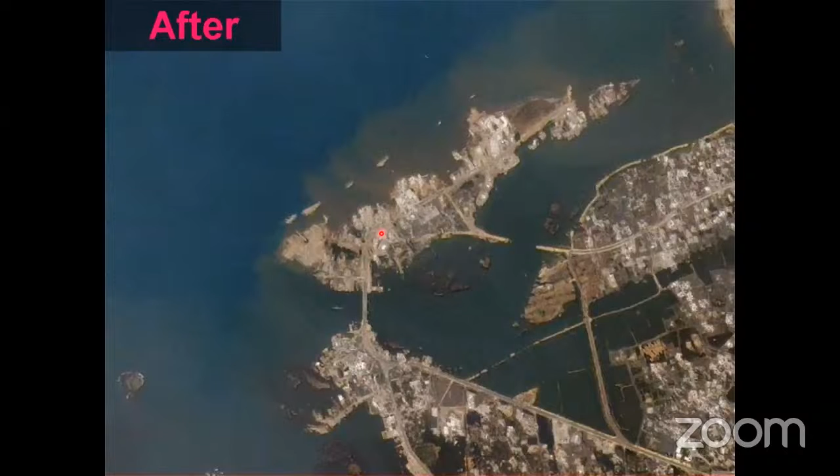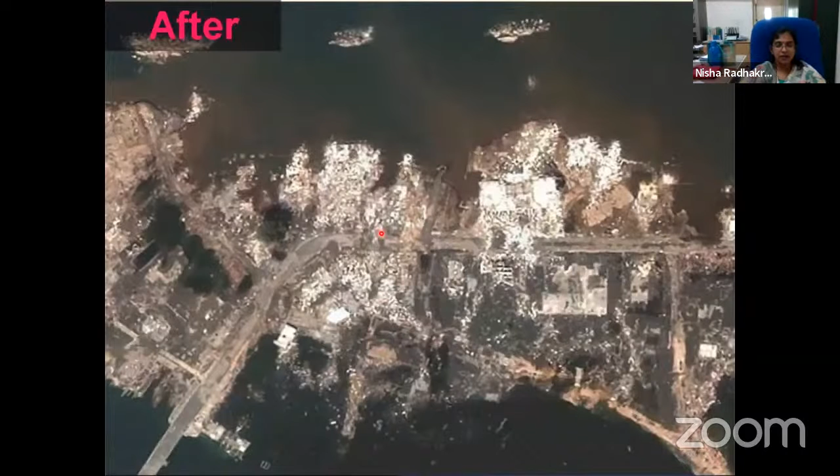Here also, before is just an image, that is not our role. Our role is to study this image, find out the percentage of land available for each category, before the tsunami and after the tsunami, and find out which requires immediate attention. That is what is called disaster management. This is one major application of remote sensing, disaster management. Before, these many buildings were there; now there is nothing. So where do I start my disaster management? These images will help you.

There are many applications; these are just some I have mentioned. You can do many more: smart cities, ITS, structural deformation, site suitability, photogrammetry. Now there is Mars analysis also, where you use photos for studying Mars. ISRO is doing a lot of work on remote sensing. So advanced surveying tools are useful in almost every front. It is now an interdisciplinary science, connected with civil engineering, instrumentation, electronics, earth sciences, and physics.

In foreign universities, it is either connected with civil engineering or with atmospheric sciences. So it has got different names and different applications. As a civil engineer, we mostly look into the application part. An electronics person looks into the digital part, and computer science looks into the software part. So it is an interdisciplinary science with many applications. It is very economical, less time consuming, and many organizations work on this, from DST to ISRO, NRSA, IIRS, and others.

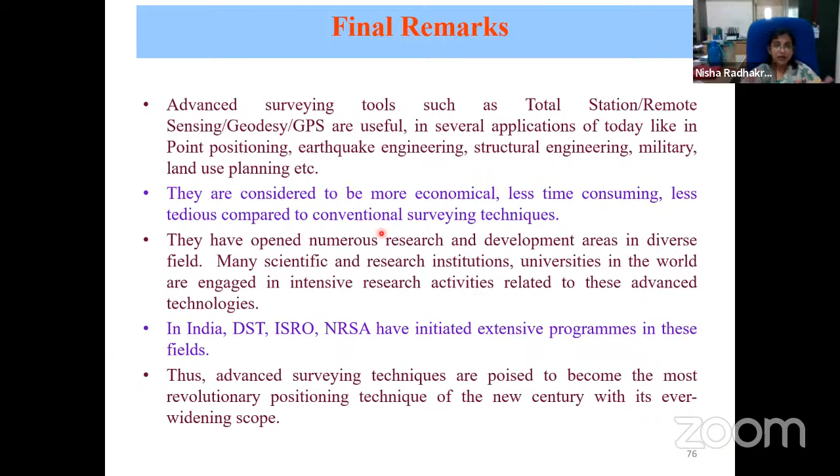Now artificial intelligence is also embedded in these techniques, which are revolutionary for the future. I think that's it, I tried to finish it up in whatever time I had. Thank you for the opportunity.